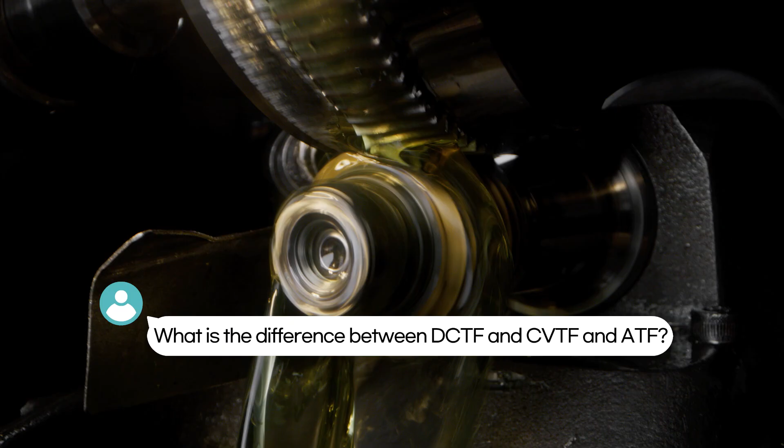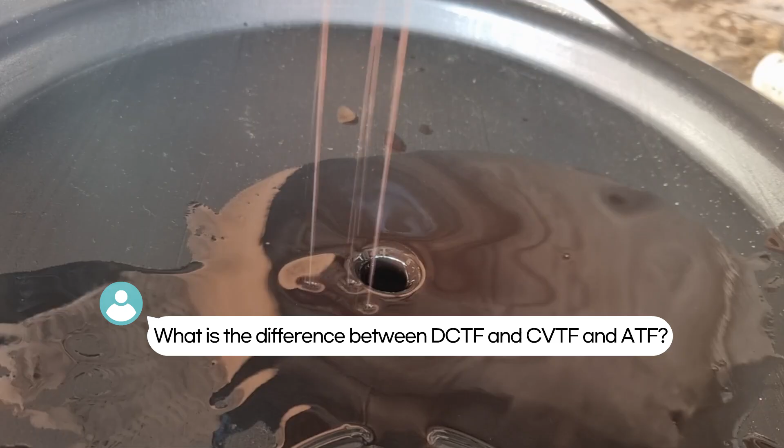How are DCTF and CVTF different from ATF? People often say that DCTs and CVTs break down more easily, so its oil needs to be changed frequently. So why is that? Well, they're all talking about automatic transmissions here.

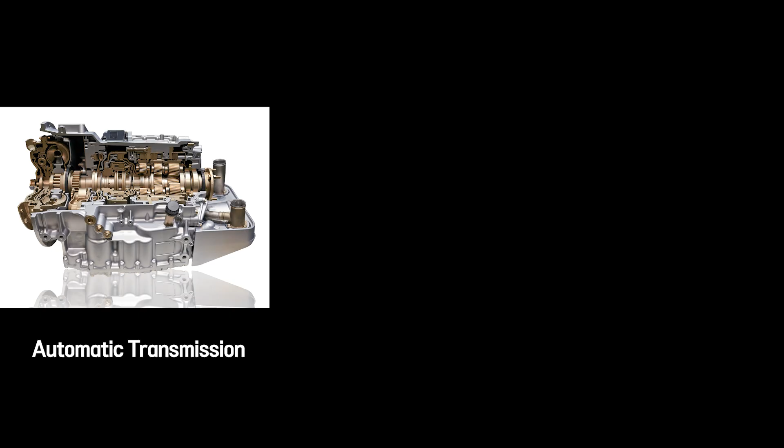Before the technology advanced, we only had manual transmissions. But as times changed, automatic transmissions started to appear. First came the automatic transmission, just the automission. Then we got the DCT, the dual clutch transmission. And after that came the CVT, the continuously variable transmission. That's how things evolved. Before DCT, there was something called the automated manual transmission.

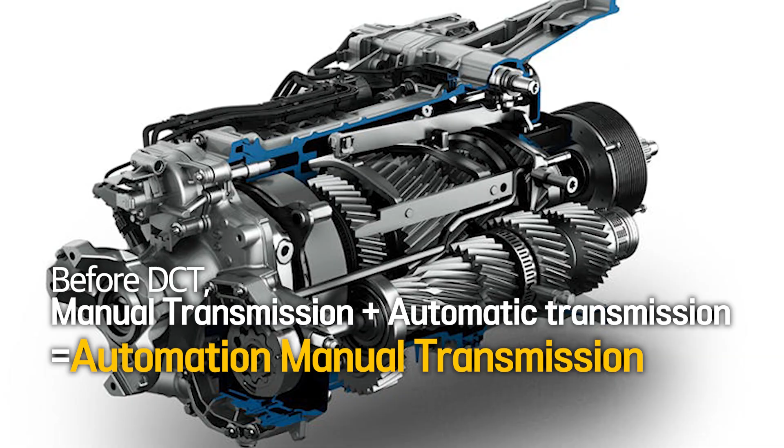Basically, they added an automatic transmission on top of it. So the gears looked just like in a manual, but they shifted automatically. That's what we call an automated manual transmission, kind of a transition in between.

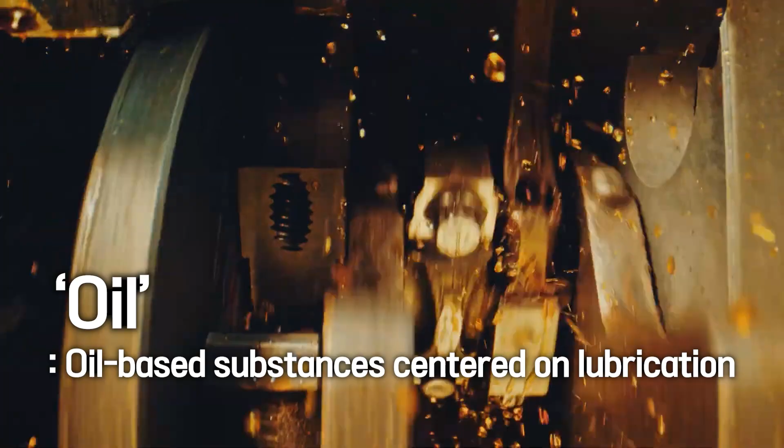And here's where the F comes in, right? ATF, DCTF, they all have an F at the end, right? F stands for fluid. In Korean, it is called ek. Let me explain the difference between oil and fluid. When the primary purpose is lubrication, we call it oil. But if it's more about circulation, cooling, rust prevention, or hydraulic pressure, even if it does have lubricating properties, we call it a fluid. So when we talk about automatic transmission fluid, or DCTF, we call it fluid because it focuses more on things other than just lubrication.

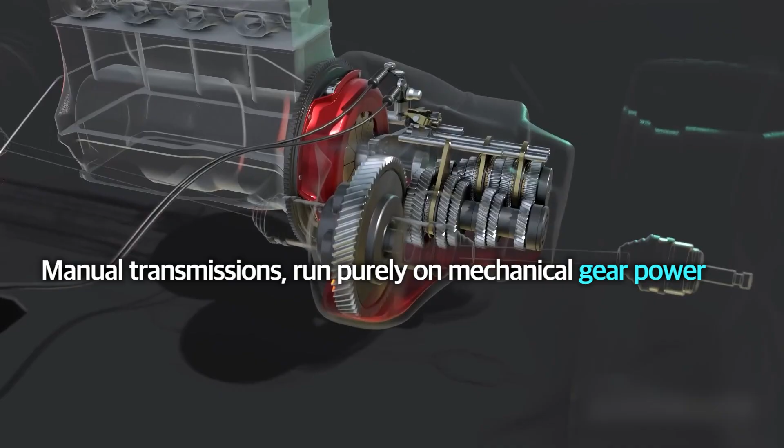But there is one exception. In a manual transmission, the gears actually rotate. It's more about lubrication than hydraulics or cooling. So it should really be called manual gear oil, but since everyone calls it transmission fluid, we call it MTF. Why are they named differently? It's because their operating principles are all different.

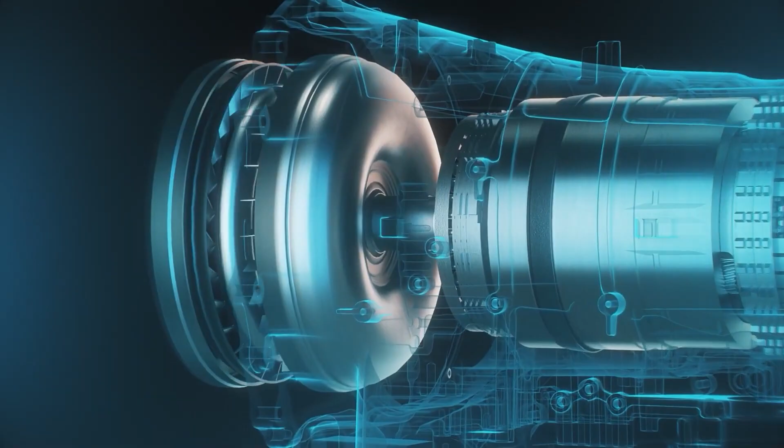What about an automatic transmission? How is it designed? It has a huge number of gear assemblies in the back. When power is transmitted, it's done using hydraulic force. At the front, there's a fan called a torque converter. As hydraulic fluid flows in and spins the fan, this converted torque is then transmitted to the clutch. The clutch, through friction, engages the friction plates, transferring power to the planetary gears to change speeds.

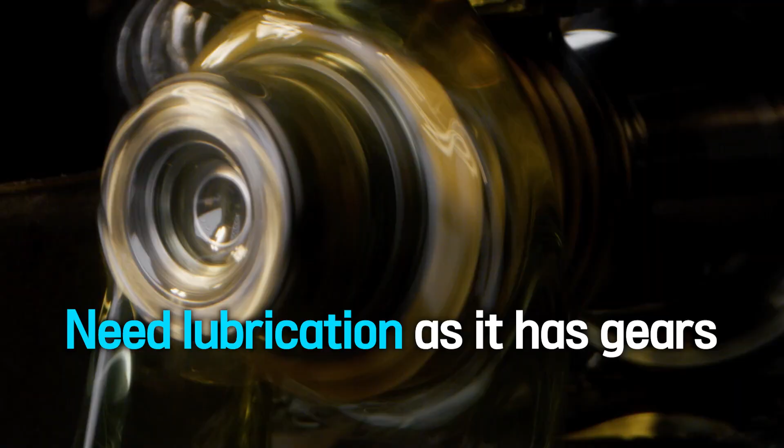Since the gears are rotating, lubrication is obviously necessary, but to operate, the torque converter spins using hydraulic power, right? So the focus is more on hydraulic power. Usually about 7 to 8 liters of fluid go in.

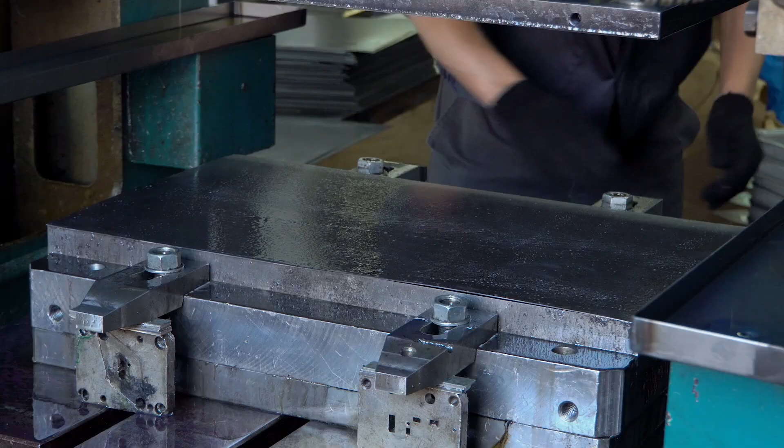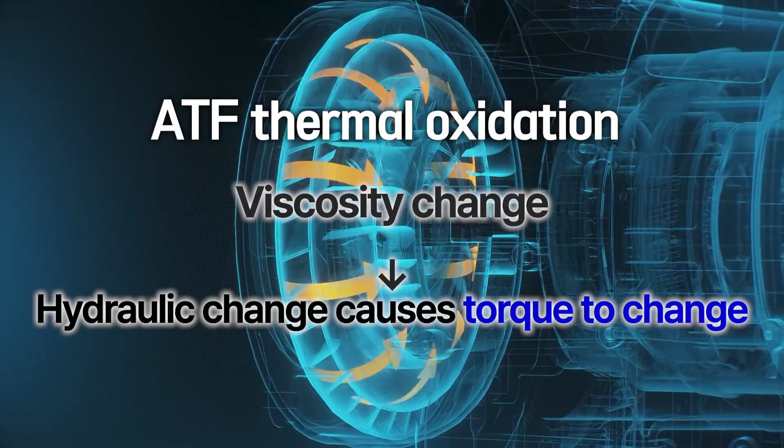That's quite a lot. Imagine a factory stamping out products with a press. It uses hydraulic power to press them down. If the hydraulic fluid changes and its viscosity alters, then the exact force won't be transmitted, right? It's like that. If the viscosity of hydraulic fluid changes, the force changes. If automatic transmission fluid undergoes thermal oxidation and its viscosity changes, the torque transmitted will also change. That shouldn't happen. It needs to be designed to prevent thermal oxidation.

And since the gears are rotating, it also needs lubrication, of course. That means it involves friction plates. So friction plates must be included. A friction modifier needs to be added there. All these elements must be present.

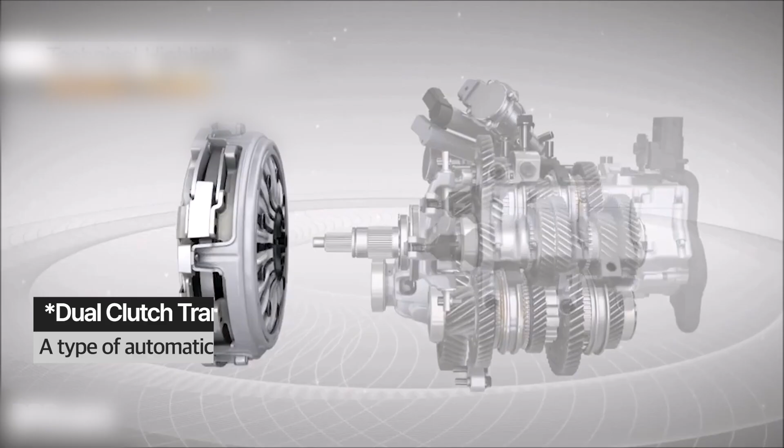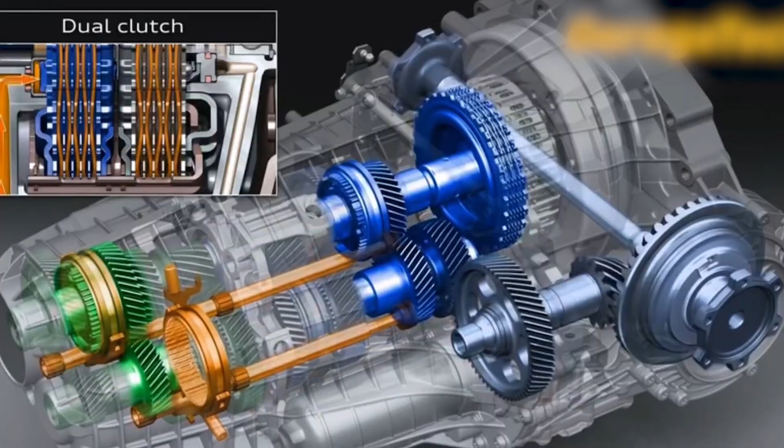Moving on to DCTF. In a dual clutch transmission, there are 2 clutches, but instead of pressing it with your foot, the clutch is engaged by electric control. So there are 2 clutches like this, and 2 drive shafts. At this point, the gears engage with each other. They adjust to change the speed. This isn't about hydraulic power. As I mentioned, it's a combination of gears.

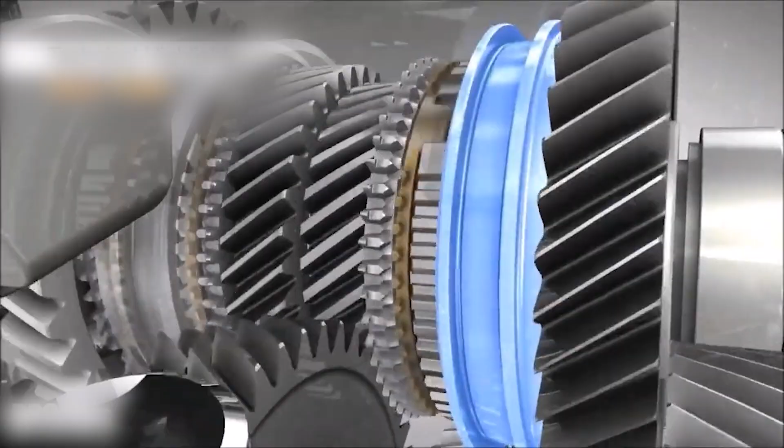Instead of calling it fluid, it should really be called oil, but conventionally, it's referred to as transmission fluid, smaller in scale. DCTF uses less fluid. Only about 2 to 3 liters go in. Making it operate in a small space is a harsh condition.

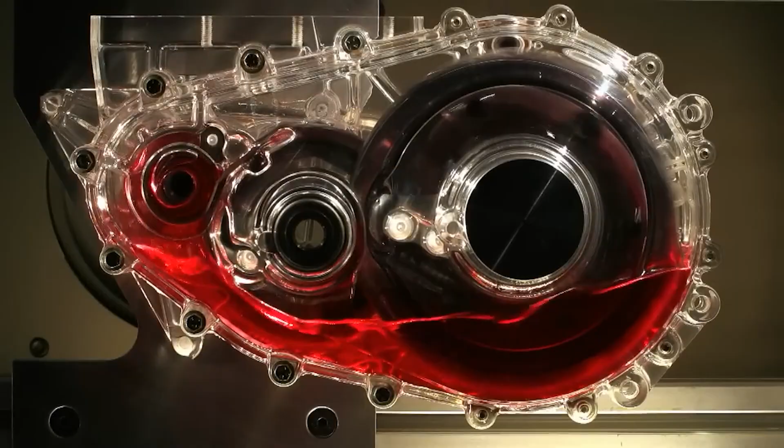Since the gears are also meshing and rotating, and friction plates need to engage and adjust, a lot of thermal oxidation occurs due to friction heat. The lubricant volume is small, yet a lot of thermal oxidation occurs here. That makes it truly harsh conditions. The lifespan shortens, so these also need to be made with very good synthetic oils.

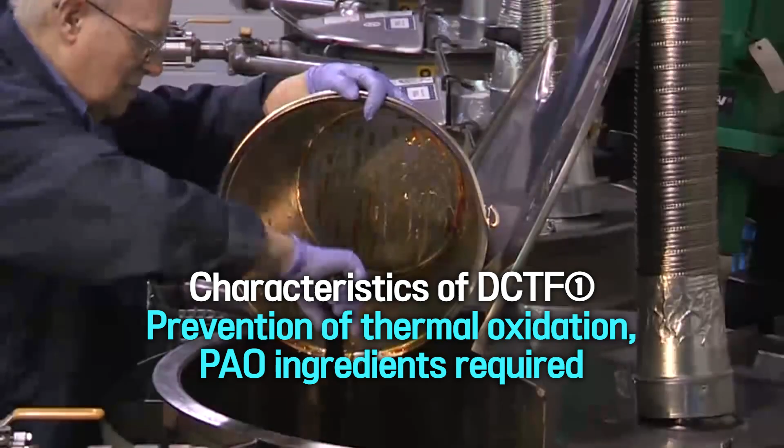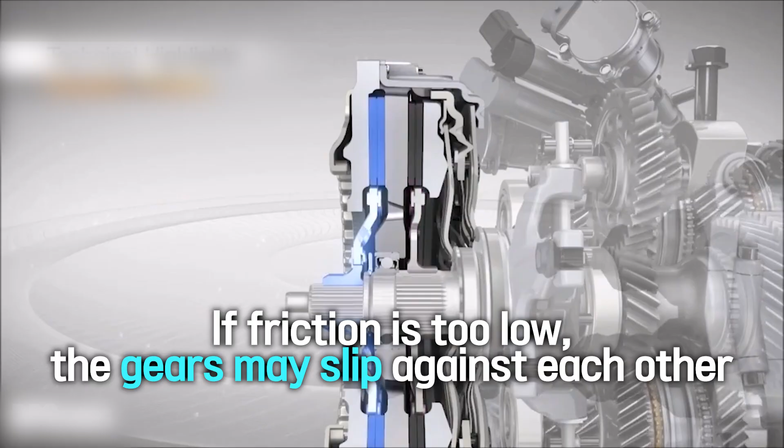And since the mechanism is small, it needs to be formulated with low viscosity. People might say, just reduce the friction. But if the clutch doesn't have the right amount of friction, it could slip. It needs to engage and rotate precisely. What if the gears don't turn? So friction characteristics are crucial.

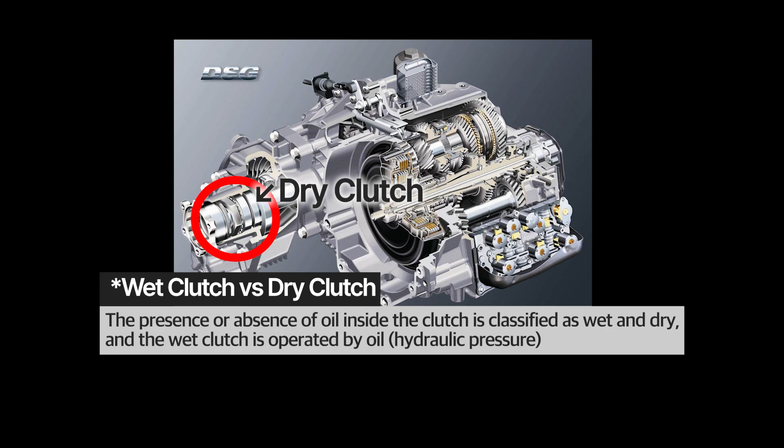DCTs have both wet and dry clutches. When the clutch is immersed in lubricant, that's what we call a wet clutch. A dry clutch is located externally. The lubricant only goes into the gear, right? When we talk about DCTs, we're typically referring to wet clutches. This is how I hope you can understand it.

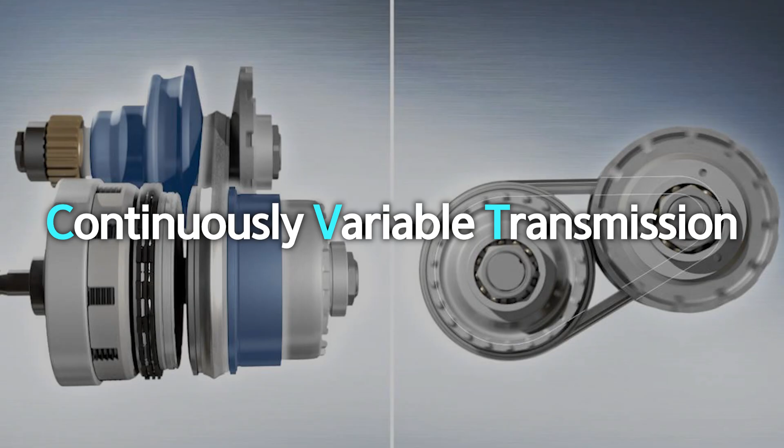Next, CVT, continuously variable transmission. It's a transmission that provides continuous changes. It's like those 2 triangular cone shapes you see at amusement parks, which are called diabolos. CVTs also have 2 cone-like shapes attached. These are called pulleys, and there are either 2 of them or a single cone shape like this. Then a chain belt is wrapped around them.

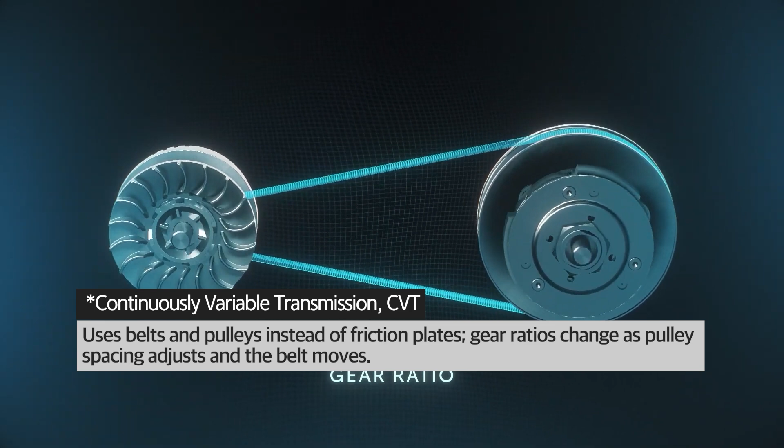Problems like corrosion can occur, so oxidation stability needs to be very good. Bubbles must absolutely not form inside. It moves back and forth due to friction between the chain belt and the pulleys. Therefore, the friction characteristics for this are very important. It's a bit different from friction with friction plates.

Developing CVTF is also not easy. They frequently break down, which meant frequent oil changes, right? DCTF units are smaller, and I mentioned they only take about 2 to 3 liters. They undergo thermal oxidation very quickly. CVT units are also smaller in scale than automatic transmissions. I believe they take about 5 liters.

Also, due to its structure, CVTs generate a lot of friction heat. If debris or contaminants from corroded friction plates or other parts get in, it won't move smoothly. Once the movement isn't smooth, thermal oxidation accelerates rapidly. When aiming for low viscosity to move such a complex structure, thermal oxidation happens quickly. Therefore, their lifespan is even shorter than ATF, and they break down faster.

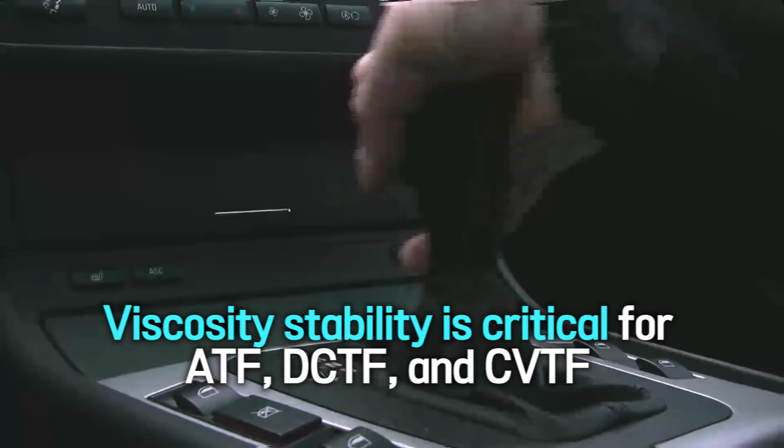For ATF, DCTF, and CVTF, viscosity stability is crucial for all of them. What's related to viscosity is thermal oxidation stability. When thermal oxidation occurs, sludge forms and the viscosity changes, right? So these two go hand in hand.

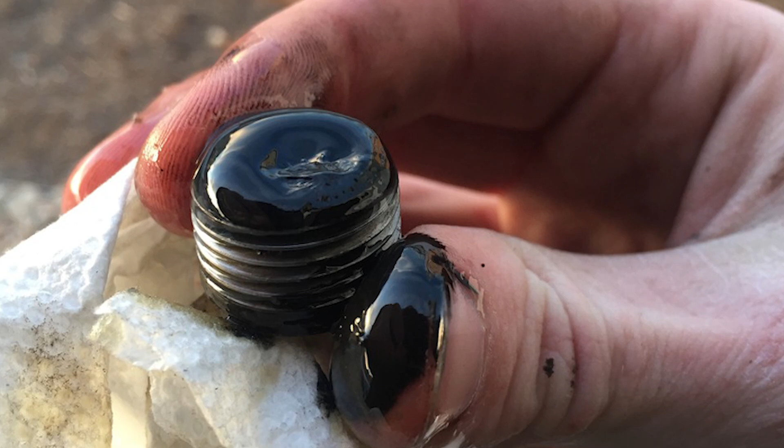All 3 types must be low viscosity, because in the past, larger cars used to have bigger automatic transmissions. That wasn't a problem then, but cars keep getting smaller, right? So the transmissions will also get smaller, and all the gears inside will get smaller too, right? Then the internal space, the design becomes very tight.

This all needs to circulate for lubrication, and if the lubricant is too thick, it won't circulate. That's why everything needs to go towards low viscosity. It's a low viscosity trend anyway.

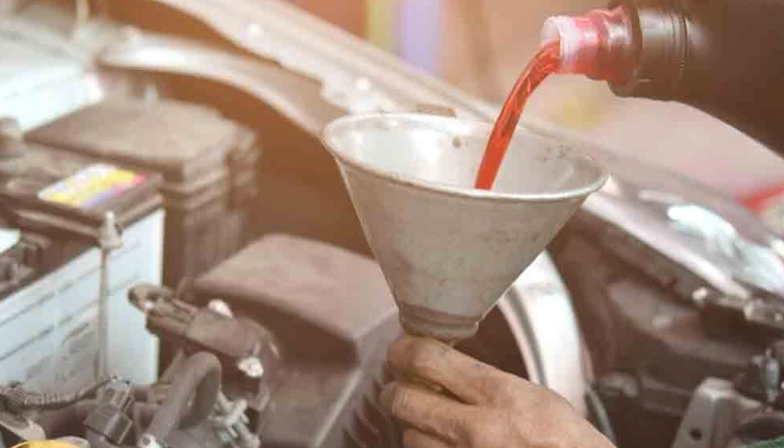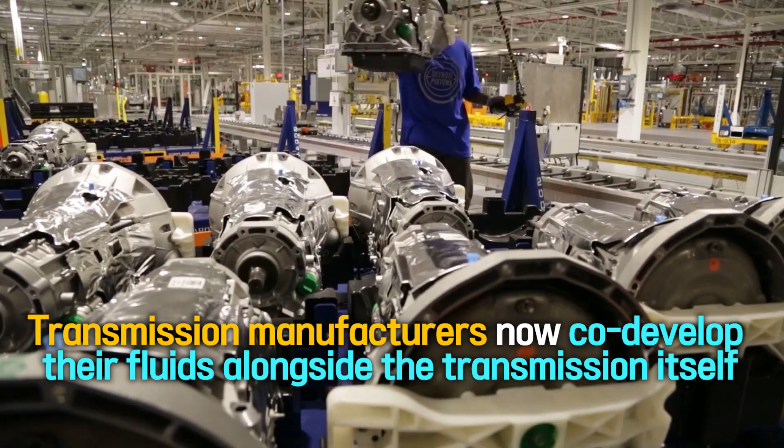Well, some people ask, is there a universal oil? Well, maybe it could be developed, but it's not like that. Because each car manufacturer chooses different transmissions, right? They develop the oil along with the transmission. The companies that make transmissions hold the specifications. There are no international standards. Each operates on a different principle, and you must buy and use the oil that matches it. Otherwise, it will break down.

Most of these come as lifetime or no change oil. What lifetime or no change means is this: people usually replace their cars after driving about 100,000 to 150,000 kilometers, right? They're basically telling you to replace it around that time, but it's definitely true that transmission fluid must be changed. Oils cannot be used for a lifetime. I hope that answered your question.